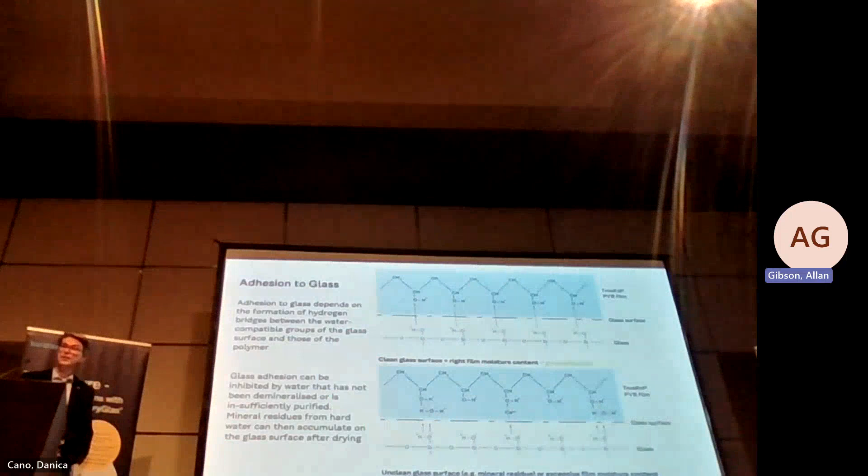Proper glass cleaning requires quality water. Only demineralized water with a conductivity of less than 20 microsiemens is effective to ensure a strong adhesion bond of

The polymer and the glass. As important is the storage of the interlayer. Moisture content of the material can adversely affect the adhesion qualities. Rolls are supplied in a protective film made of aluminium and aluminium coated polyethylene, which prevents moisture ingress whilst the roll is being stored. After use, it should be resealed, or if the roll is opened, it should be stored in a humidity controlled environment.

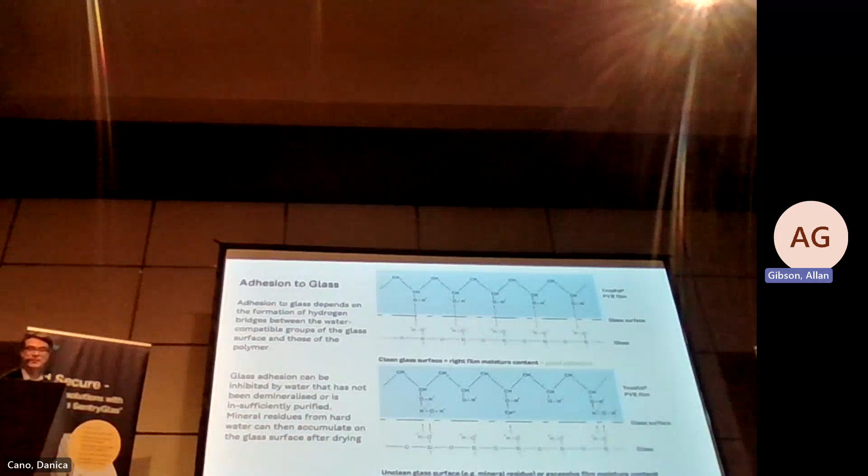SentryGlas, however, is slightly different. It's recommended that the interlayer not be used if the moisture is above 0.2%, when measured by Karl Fischer titration. Once this level is exceeded, the moisture content cannot be reversed, unlike PVB, and storage needs to be below 20% relative humidity, ideally resealed. Unlike SentryGlas, PVB can be dehumidified to 0.3% moisture content, but once it's allowed to reacclimatize itself in the correct environment.

Rolls with a PE interleave, which is very common, can be sealed back and stored at 30 degrees Celsius for the long term. In a humidity controlled environment it can last a lot longer, but the refrigeration needs to be around 18 degrees Celsius, and you're looking at a shelf life of around 4 years. So we know that works.

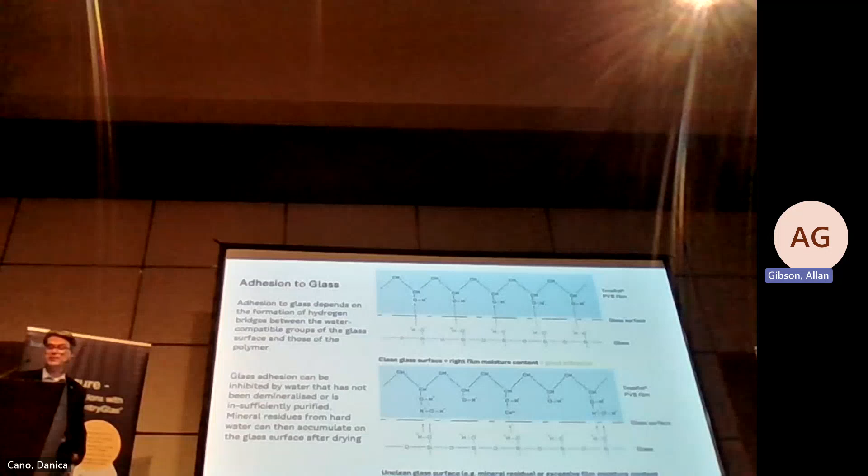So what is the cause? Now let's look at some of those causes of delamination. As a manufacturer, we run extensive tests to ensure the suitability and production quality of the material. From a quality perspective, ISO 12543 Part 4 provides test methods for durability, and it mimics the excessive conditions expected when the material is in an installed state. The three main objectives are to look at the aesthetics and measure bubbles, cloudiness, and ultimate delamination.

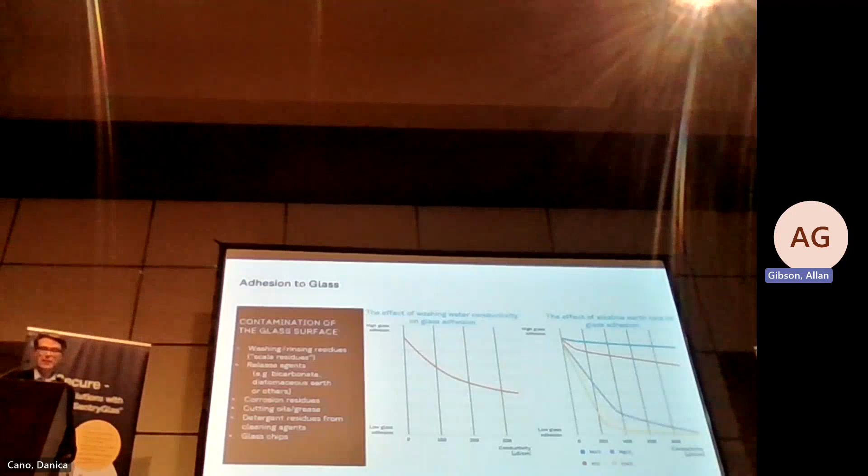This is a similar methodology used for sealing compatibility, which I'll go through later. Methods of testing, as you can see, include temperature, humidity, and solar radiation.

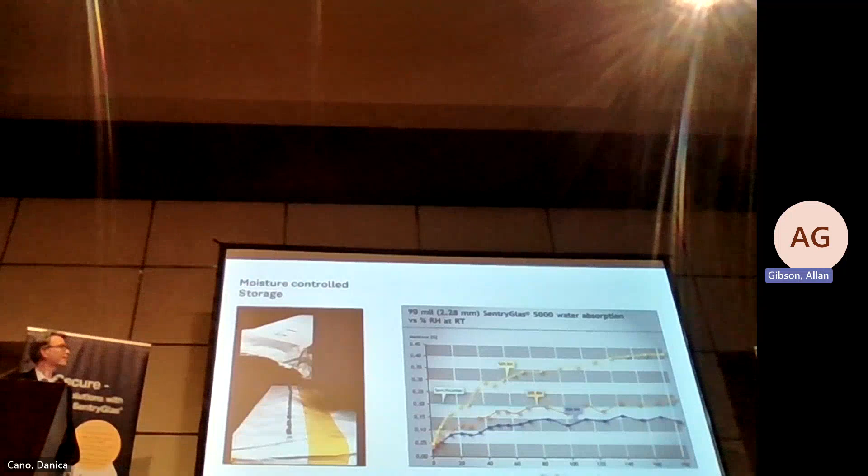These are the test methods for durability, looking at the three different options: temperature, humidity, and solar radiation.

Overall bow may also vary dependent on glass diameter and thickness, size, aspect ratio, and other factors like roller wave caused by the glass moving over a roller at high temperatures when the glass is being fully tempered. This will give a slight waviness to the glass, and it can be very much affected by the thickness of the glass, but also the pitch of the rollers. This is what is commonly known as roller wave.

Standards in BS EN 12150 Part 1 for toughened soda lime silicate safety glass state accepted limits of overall bow and roller wave tolerances between 0.2 and 0.5 millimeters as an acceptable standard, depending on the glass type and thickness, etc. But most processors will in fact produce lower than that.

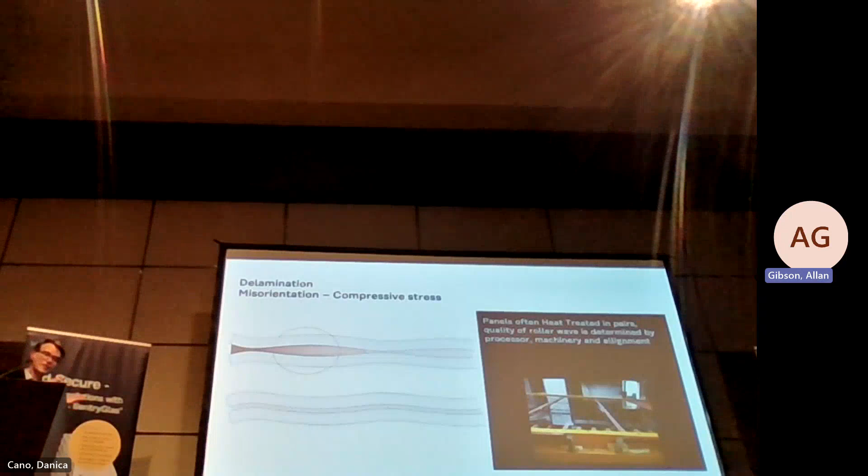When dealing with interlayers with a gauge of 0.76 millimeters, for instance, with a tolerance of 0.5 millimeters, there is a high risk that the void will not be filled, especially during processing where you're squeezing the plies of glass together under heat to extract as much air as possible, applying pressure before it's autoclaved.

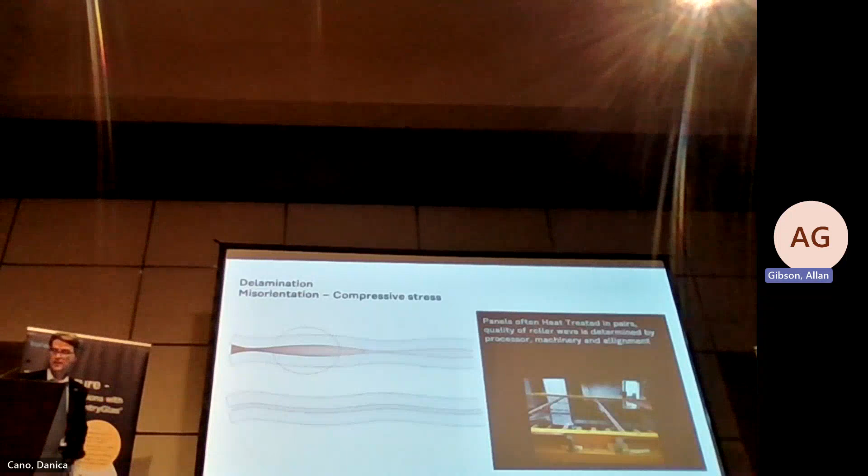But should this occur, then over time, when the material is installed with thermal movement of expansion and contraction, it can open up and prise open the glass and reveal the laminated glass, and an air pocket or failure can occur as a result of that.

Before assembly, ensure that the glass is dry. The SentryGlas must utilize the following constructions: laminated safety glass directly to the tin side. There are two sides of glass, an air side and a tin side.

When it's floating over a tin bath, that's when you get the nice smooth float glass, as it's commonly known. The side that's on the tin is known as the tin side, and the side that's not on the tin is called the air side.

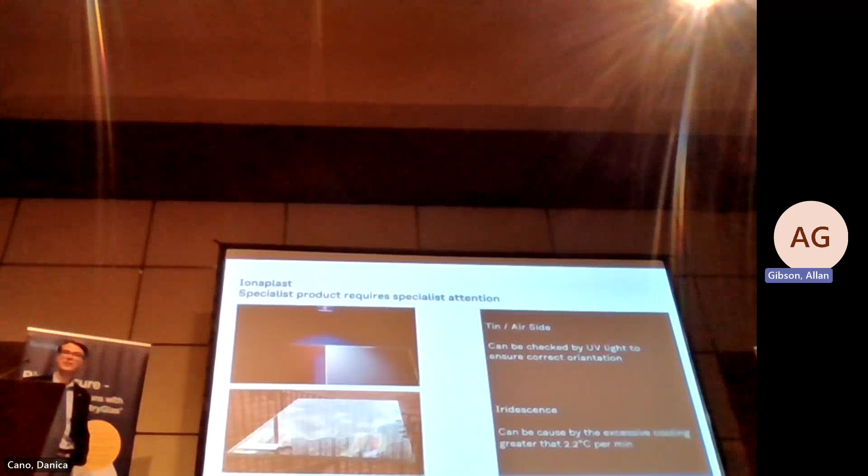However, it could be applied inappropriately. It could be too thick, or maybe the adhesion promoter is out of date. So if you apply excessive amounts of this adhesion promoter, this too could cause issues at another stage of installation.

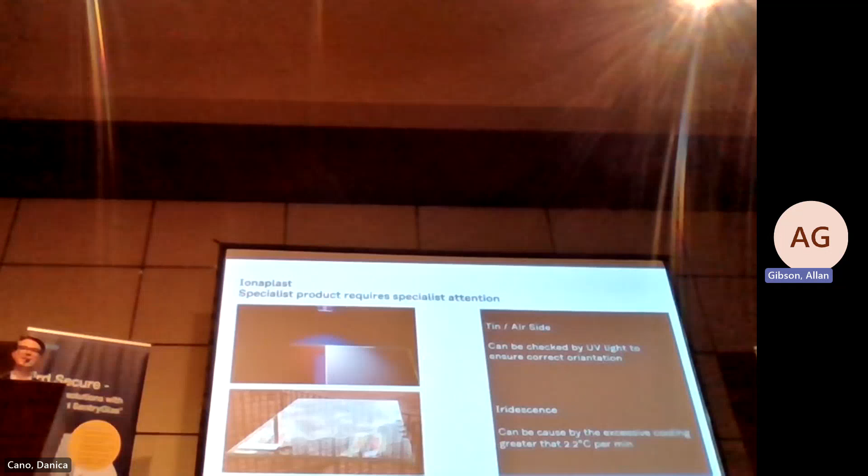Now, the cooling rate of an autoclave, the pressure cooker that laminated glass is put into to disperse the air during processing, needs to be rapidly cooled, a bit differently to a PVB. Cooling SentryGlas at a rate of 2.2 degrees Celsius per minute will help reduce the risk of haze, which is often associated with SentryGlas. However, if you cool it down too fast, you have a risk of producing iridescence. It's almost like black magic, these glass processes - they have a lot to deal with: cleaning the glass, laminating, making sure everything is correct.

But it's not just the glass or the glass processing that could cause defects. Look at moisture - we're looking at frames now. If gaskets or seals break down, it can leave the interlayer fully submerged in water. You get a lot of moisture content in the air, it condensates on the cool glass, drips into the frame, and the interlayer ends up in a pool of water. Because PVB is hygroscopic, it will absorb the moisture and could cause that milky hue we saw on the salt spray test earlier.

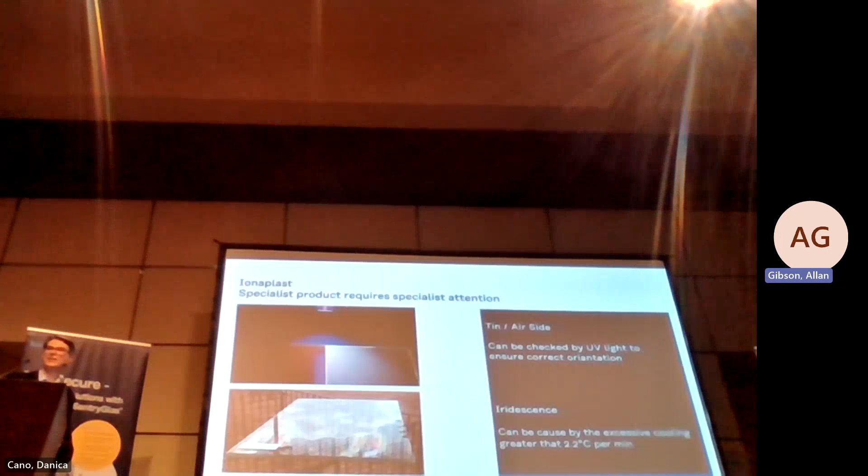Worst case scenario, which happens quite often in the Middle East, is that the materials will be ready, shipped to site, but then stay in storage for many weeks before they're actually installed. All those open edges over time are drawing in moisture - it looks fine. Then they'll be installed, trapping all that moisture. As you can see in the image, this could seal in the moisture and cause a risk of delamination at a later stage.

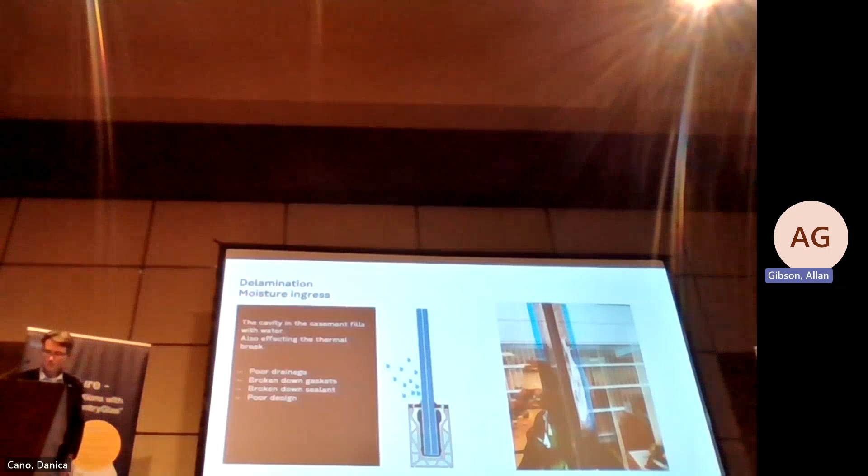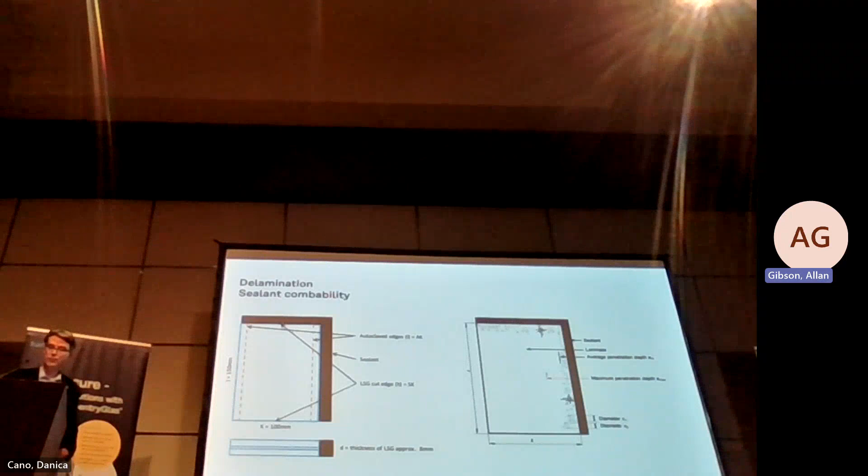Now, ASTM C1087 looks at sealant compatibility - it's a test method that checks for defects. It's also partially covered under EN ISO 12543 Part 4, but that doesn't necessarily look at discoloration as well. The compatibility of two or more materials consists in their capacity to coexist in a juxtaposition for a long period of time, without manifesting signs of detachment or delamination, discoloration, or alterations that may occur during chemical interactions. That's the terminology used for the test method.

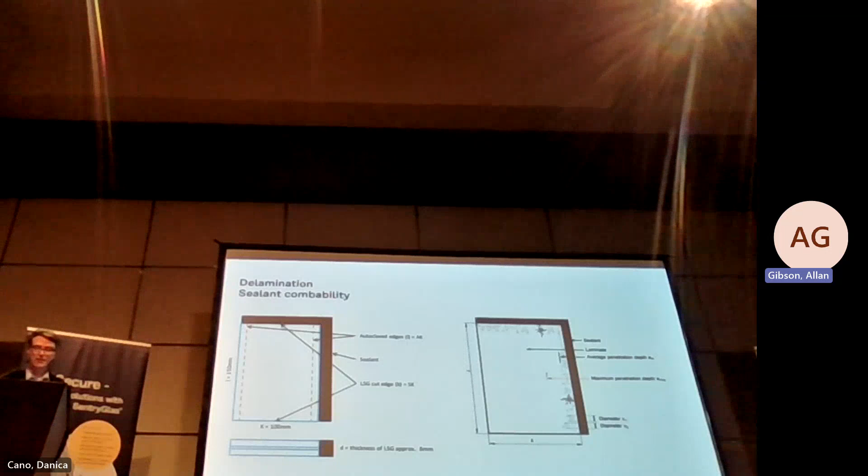So the test method for checking sealant compatibility is similar to the accelerated test I showed you earlier to check the quality of laminated interlayer glass. But this also has some similarities to the performance monitoring testing regime we have for sentry glass samples.

The compatibility test gives us data recording visible defects, which could be edge bubbles, a chain of bubbles, or channels, and discoloration.

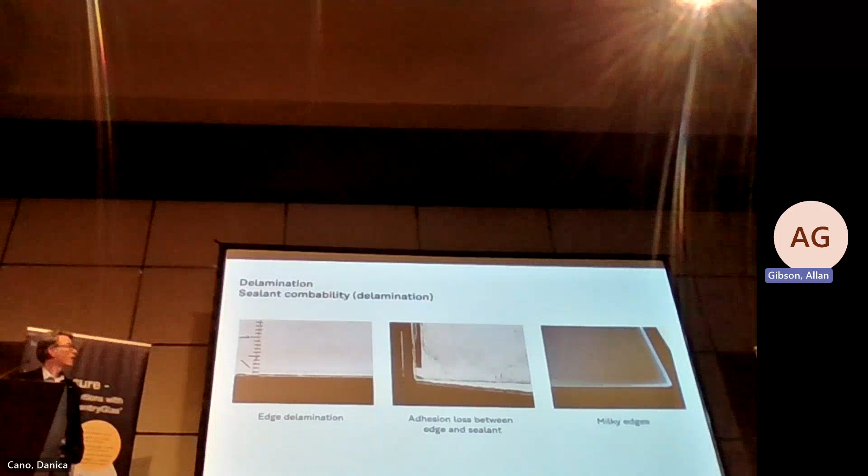Now, the depth of delamination, the degree of adhesion loss between the edge and sealant, or the visual milky effect that we saw in the salt spray test, are also observed and available.

Now, much research has been carried out by the main suppliers of sealants and adhesives, and we have compiled an extensive list of compatibility test data to help ensure the correct sealant is chosen for the appropriate role. This is available on request, and it's constantly being updated, so make sure you're requesting it on a regular basis to ensure compatibility.

There is no single standard for optical performance. Limitations only measure the glass surface, scratches, inclusions, optical performance like light transmission, but not the clarity.

Kuraray interlayer boasts the lowest readings on the yellowness index, which is why they're the most popular for the architectural industry. Especially with the increased use of low iron glass, clarity is key, and the UltraClear and SentryGlas products offer the best performance in this field. When using tints with a PVB, you wouldn't want a yellowish effect to tone the finished result, would you?

There is no standard for the optical clarity of laminated glass, but much is known about the index of refraction that measures a ray of light as it travels from one medium to another. As it begins to travel through a material, the interaction between electrons and photons reduces the speed of light, and as the density of electrons increases, the velocity of light becomes slower.

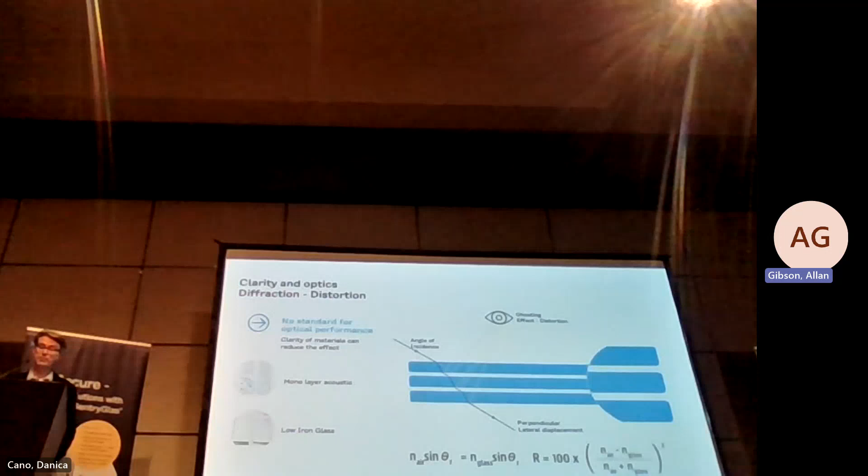That's why light moves at the highest possible speed in a vacuum. The light's transmission angle can be calculated using Snell's law, and the discrepancy between the light transmission and the incident angle becomes bigger as the index of refraction becomes larger.

A change in the index of refraction due to the change of wavelength is known as chromatic dispersion. The more layers in the construction, or the greater the angle of incidence, can increase this factor, causing ghost images. This is why a mono acoustic interlayer, reducing the number of layers, can reduce this optical effect. But also the clarity and coupling effects of an interlayer can add additional benefits affecting chromatic dispersion.

Now I'll finish with the beware. Cost of ownership is heavily influenced by the right product ultimately being fit for purpose. However, that product that is fit for purpose may also offer additional attributes and added benefits. These added benefits may improve structural, optical, and thermal performance, sound reduction, solar control, ease of maintenance, etc.

Here are some other factors that influence the cost of ownership. In my short time within the industry, I have witnessed some failings that have resulted in very costly replacements. Replacements that were needless and often associated with specifications that were not fit for purpose, or later became generic during the tendering process, opening the door to similar or approved or value engineering, without fully understanding the reason behind the original specification.

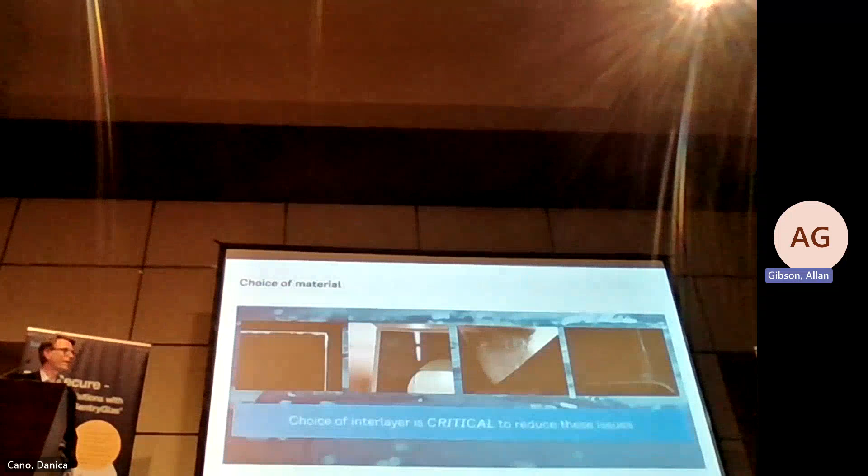Sorry, next slide please, I got carried away. It's a very emotional part of that. Go on, carry on please.

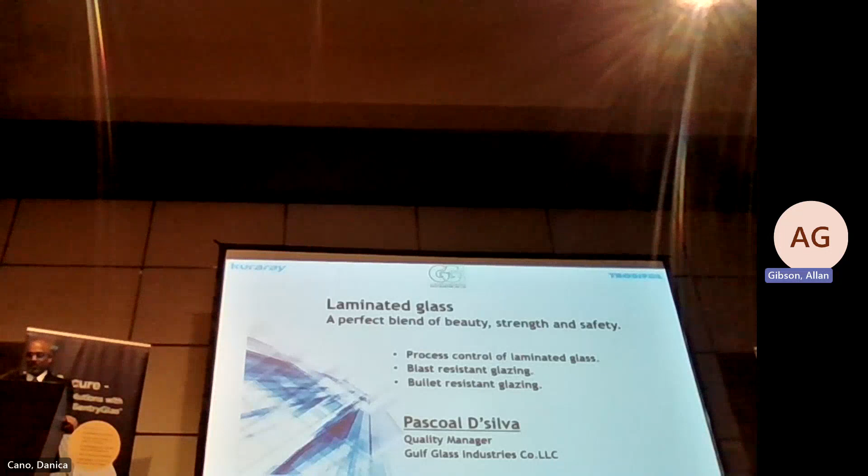My name is Pascoal D'Silva. I've been in the glass and glazing industry for nearly 25 years, and 20 of those years I've been working with Gulf Glass Industries. Some of you know Gulf Glass Industries - it's a 31 year old company, the first company to laminate glass in the UAE and the Middle East, so we're the first laminators. So what we're sharing here is all about our 20 years of experience in laminating glass. Apart from that, we were the first ones to install SentryGlas, laminated exposed edge glass, on a building on Sheikh Zayed Road in 2009. By now it has passed its warranty, but it's still looking good. It's a building called Maze Tower. If you ever get a chance, you can have a look at that laminated glass, exposed edge, perfect beauty.

So laminated glass has many interlayers - the types of interlayers that Kuraray's Allan has touched on, I would just expound on that. There's something called EVA, we have polycarbonate and PU, and we have cast in place, known as resin. These are the types of interlayers that go into laminated safety glass. Making laminated glass is not an easy thing - it's a very, very sophisticated control process, and that's why we need to look at process control. You can see the two main ingredients, or the two main criteria, are glass and the interlayer.

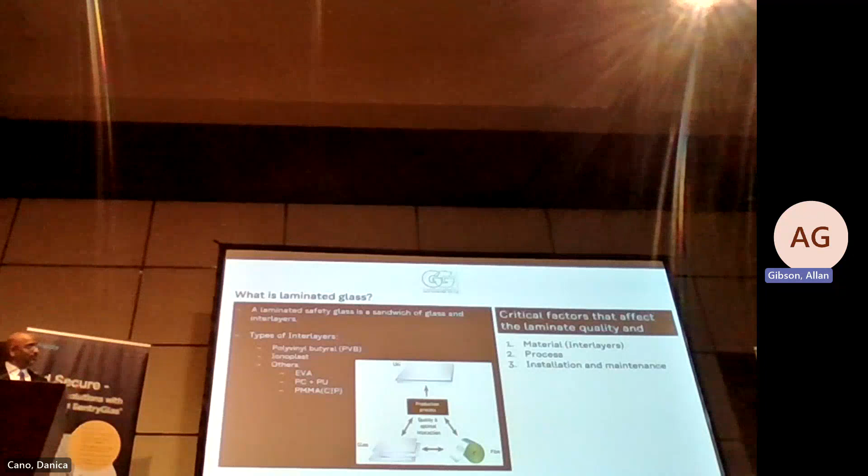So what are the critical factors that affect laminate quality? First is material, second is the process, third is installation and maintenance, which Allan has touched on a little bit.

Cheap can be expensive, and this is what is happening, this is what we find mostly. Until 10 years back, everybody specified - architects were saying 5 years laminated glass warranty. Now we have specifications asking for 10 years, extended to 15, extended to 20 years. When we go to PVB manufacturers they say, guys, this is your problem, you are the black magician, you deal with it. So the specifications and the life expectancy of laminated glass is 25 years. So how do you give a product in this market that is going to reach such warranties or life cycle? That's the critical thing.

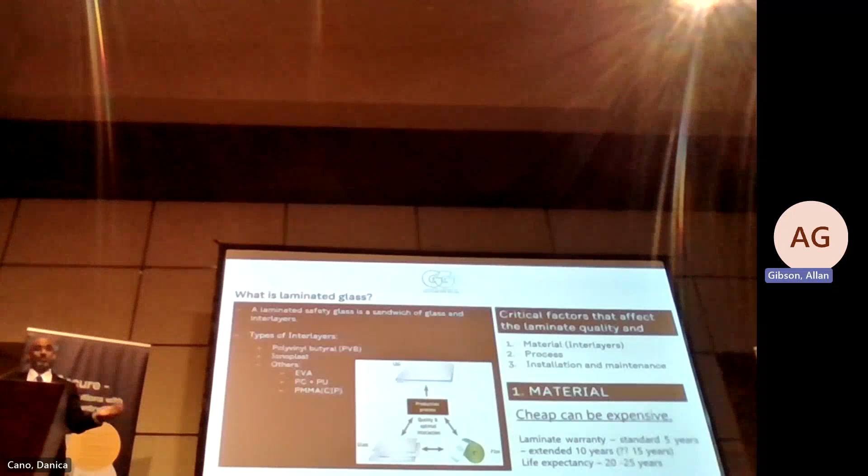Until 10 years back, we had only 5 PVB manufacturers - today we have 50, and none of them have accelerated testing or weathering tests done like our friend Allan showed us, the accelerated weather test or weatherability test. So it is something where cheap can be expensive, especially if you have a building with laminated glass.

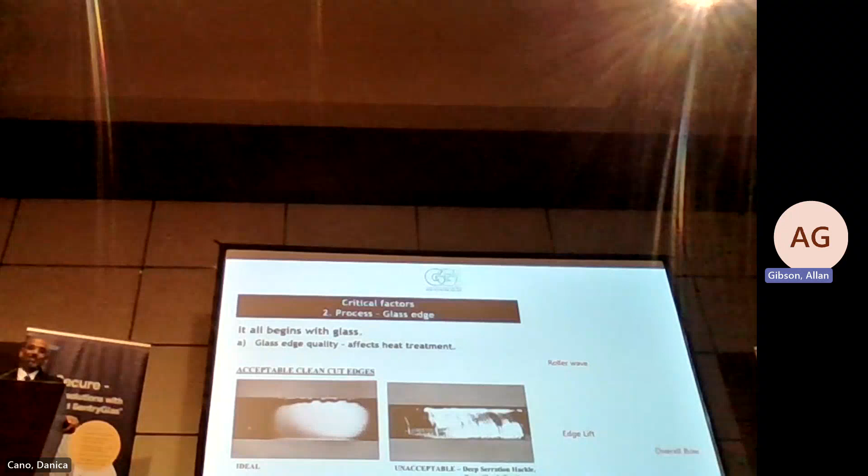The critical factor we spoke about is the interlayer. The second thing is glass, and that is the main ingredient. If you do not cut your glass properly—and that is why we are the processors—you need to be very careful of how you process the glass.

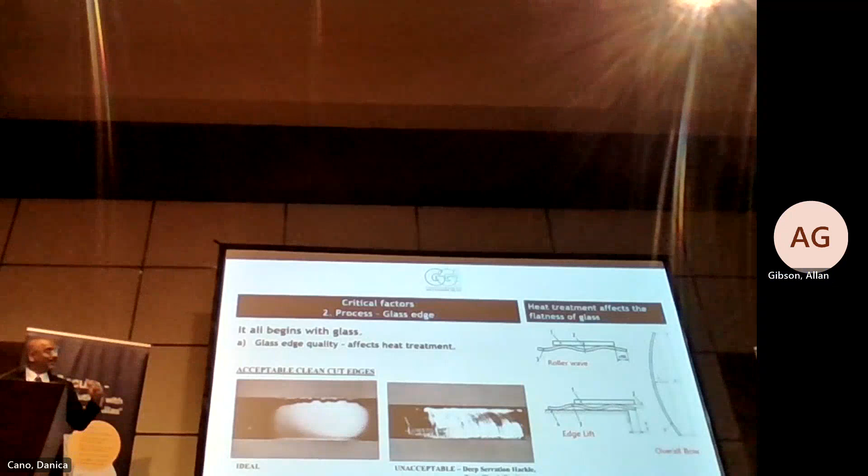If the quality of the glass edge is not perfect, it will affect your heat treatment quality. Heat treatment affects the flatness of your glass—that means roller wave, edge lift, and overall bow.

So it all begins with glass. Lamination begins with glass, not the interlayer. It begins with getting your glass right.

The European standards, which Allan referred to, are EN 12150, EN 1863, BS EN, and ASTM C1048—which doesn't have much. But the most stringent one is the EN standard, 12150 and 1863. But those European standards for toughened glass or heat strengthened glass are not good enough for lamination, and specifications still continue referencing the European standard, saying 'we follow the European standard.'

What is the recommended flatness for laminated glass, heat treated flat glass? Something like this: roller wave should be less than or equal to 0.08mm compared to the 0.3mm standard. Edge lift, 0.15mm compared to the standard 0.25mm. Local bow, 50% down, less than 1.5mm per meter compared to 3mm.

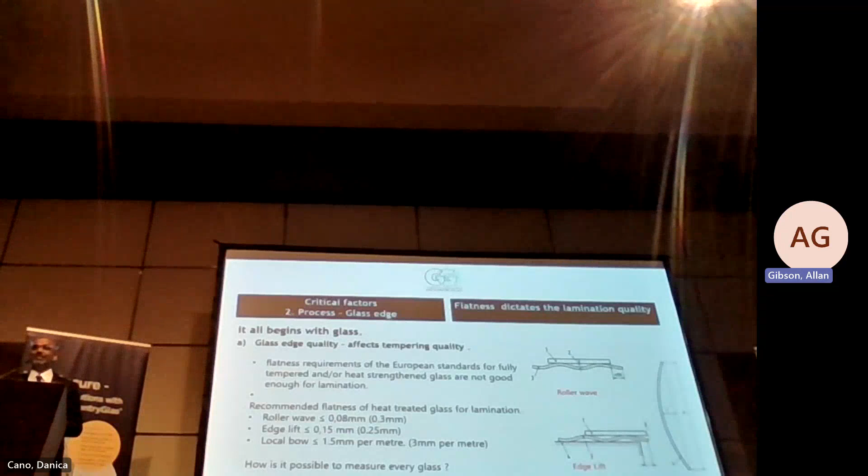So the question is, I have 10,000 or 20,000 square meters of glass laminated—how do you control it? Technology has advanced. You can measure each and every piece of glass that comes out, especially for laminated glass, and make sure your values are in range.

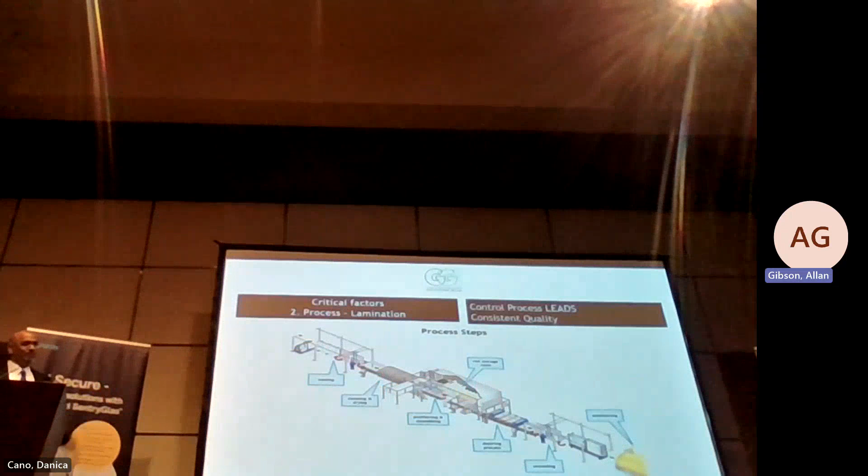Just a process—this is the lamination process. Looks easy: loading, cleaning, drying, positioning, roll storage. It looks like a laundry thing, but it is not. De-airing process, unloading, and then the autoclave process.

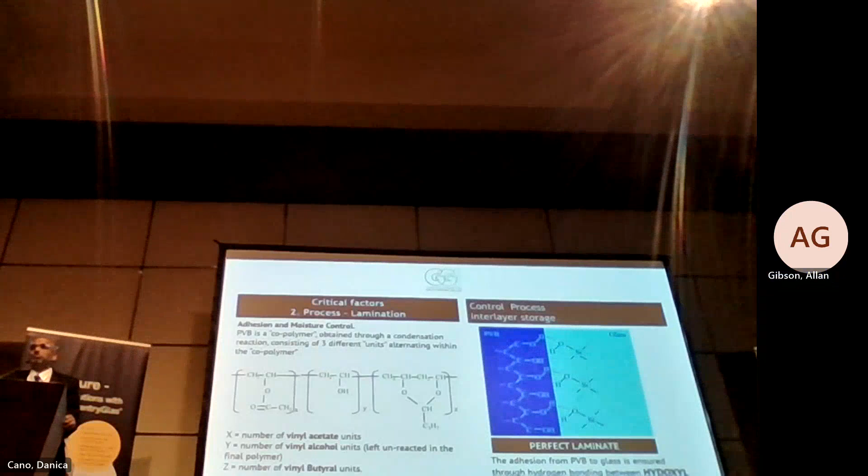We have spoken about this—it's the adhesion, at least for PVB, the hydroxyls from the PVB bonding to the silicon, and that's the perfect laminate that you would have. But unfortunately, there is no laminator who can give you this sort of perfect laminate.

Why we are saying air side and tin side: the moment you have on your glass alkaline or earth alkaline metal ions, it will create an interaction. It will create a problem for your adhesion, and this cannot be avoided.

In the Middle East today, everyone wants a glass which is outside laminated glass, coated laminated glass. You cannot have air-to-air side on a PVB with laminated coated glass, because coated glass has one side which has coating and it is the air side. So the only side available for you to laminate is the tin side. So there comes a challenge for PVB manufacturers—when you're putting glass on the external facade, you need to use high adhesion PVBs. And nobody talks about it because it's not there.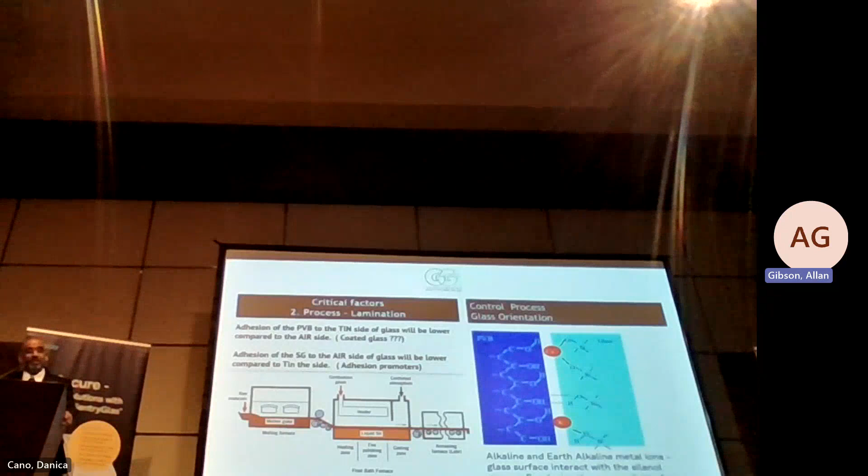So anybody can use a low adhesion PVB, and then you get delaminations after 5 years. This is critical because it is chemistry, it is what it is. For SentryGlas, you cannot laminate on the air side, so you have adhesion promoters. Those work.

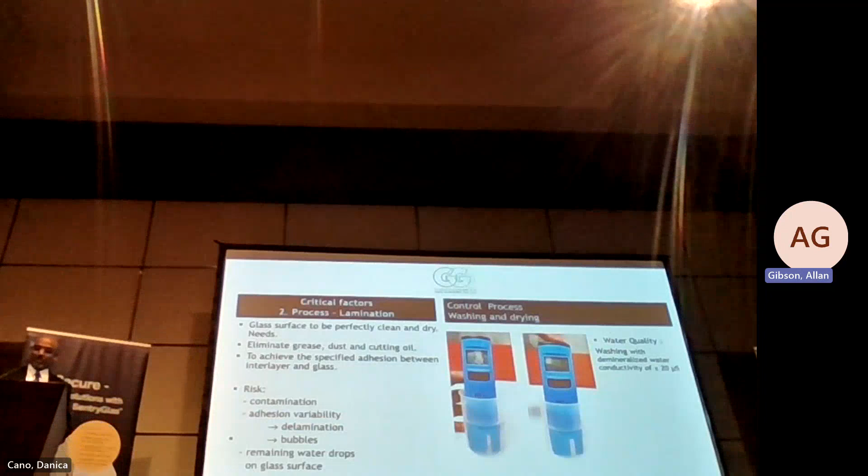We spoke about washing. The water that we drink has a conductivity of nearly 670 microsiemens. The water that we use in washing the laminate is only 16 to 20 microsiemens. So you need to be careful about who is processing your glass and how it is being processed. The conductivity of water also affects your lamination—it will have variability in adhesion, and that will cause delaminations later on and bubbles.

Next, I need to have some water.

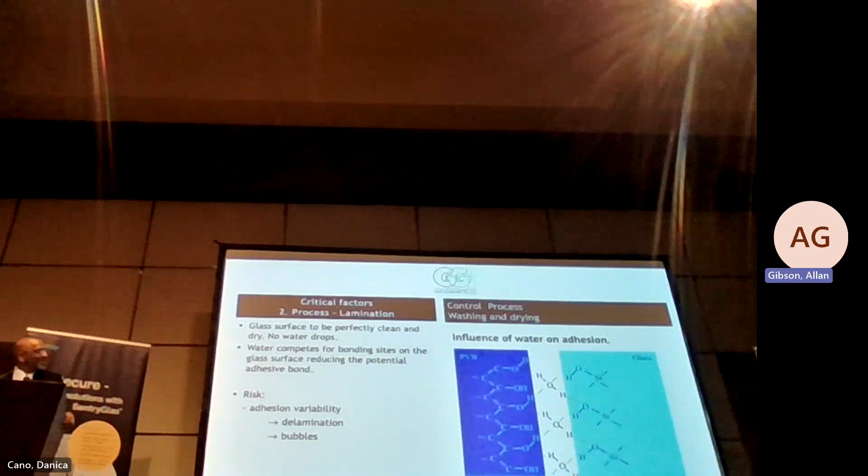Influence of water on adhesion. A single drop of water on the PVB or on the glass is a disaster for your lamination. So the glass that comes out has to be perfectly washed, dry, and clean, just like how my wife does it. So you need to bond it perfectly with no water on it.

Room conditions. You look at this guy, they enjoy working here for the next 3 months because the temperature inside there is less than 25 degrees. Relative humidity is 18 to 25%. So that sort of controlled condition is very critical because once you supply the laminate to your project, it looks perfect. The problem starts after 3, 4, 5 years.

And if you have asked for 10 years warranty, sometimes either the processor is missing or the PVB manufacturer is closed down. That's not the case with Kuraray. They said 50 years, so we have been doing lamination for them for 25 years. We can confidently say we do not have such issues. There are problems, we have learned from our experiences, but this is what makes us good laminators.

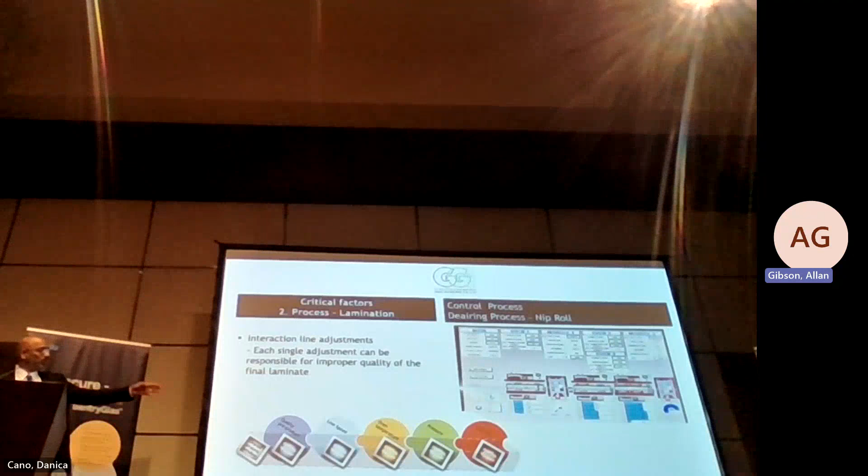De-airing process is very important. You need to remove all the air. You have 2 glasses and the layer, then you press it and remove all the air. A little bit more air remaining in the laminate will cause bubbles on the side. So each and every adjustment done on this de-airing will affect the quality of your final laminate. There are line speed, oven temperature, pressure, heaters. The heaters are now mostly convection heaters, so they are more effective.

Vacuum bag. We are talking about bullet resistant glass, curved glass. The only way you can do that is through using either vacuum bags or silicone bags. The productivity is low, but the efficiency of getting a good laminate out of de-airing from such a process, the vacuum bag process, is very good. But it's difficult to process flat laminate glasses through the vacuum bag. There are a lot of demands nowadays where you have metal interlayers in the lamination, so this is the process that can give you optimum quality.

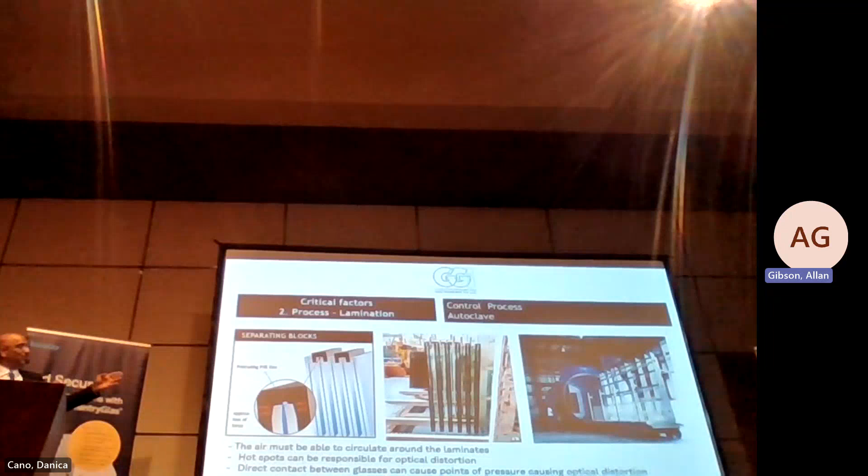This might sound simple, loading the glasses, but if you get this wrong after doing everything else correctly, you can have a sunburst delamination on the edges, just like many of us have seen, half moon shaped. That's because many people don't understand that as you stack the glasses into the autoclave, there are chances of pressure points coming on the glass. So what you see in the middle is, always try to keep the laminate freestanding, not having pressure points. And the last one is the autoclave, which Allan has already spoken about. Autoclave conditions and cycles are very important, otherwise you will end up having haze or inadequate adhesion.

So pummel test, just a picture of how pummel test is done to check whether it is high adhesion, medium adhesion, or low adhesion. It's done at minus 18 degrees centigrade using a freezer, that's for checking the adhesion.

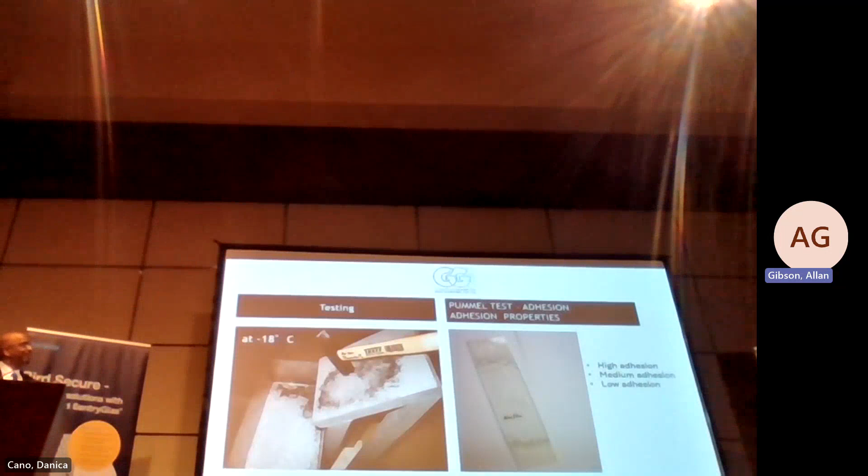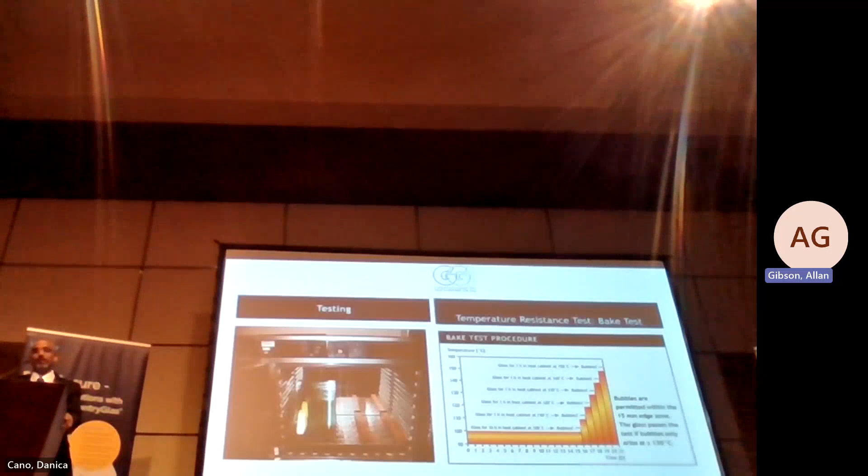The second one, this is where the temperature test is done. Basically you're raising, keeping the glass at 100 degrees centigrade for 16 hours, then incrementally increasing it 1 hour, up to 130, but after 130 you can go up to 180, 190. Temperature resistant test is very critical, considering that we are in a country where glass temperatures can easily go up to 100 degrees centigrade. And if it's a spandrel glass, that can be much higher. So using laminated glass in spandrels, you need to be aware, as most of them might be well engineered or well known on this fact, that the temperature in laminated glasses can go very high.

This is an easy test. Just in summertime, take a bucket of water, it's already 100 degrees, put your laminate in and check it out. That's the boil test. You just put it in the hot water for 2 hours. If you see bubbles, make your claim.

The important part is security glazing, and Kuraray and the Society of Facade Engineers wanted me to touch on this. Security glazing is so important because architects for the last 30, 40 years want transparency. They want glass everywhere, minimal systems, and there's high demand for transparency, getting more light in and keeping the heat outside. But we have to be a little cautious when doing such designs or considering where buildings are located, because security glazing focuses on reducing the risk of injury and material damage. So it's about people and it's about property, and both are important.

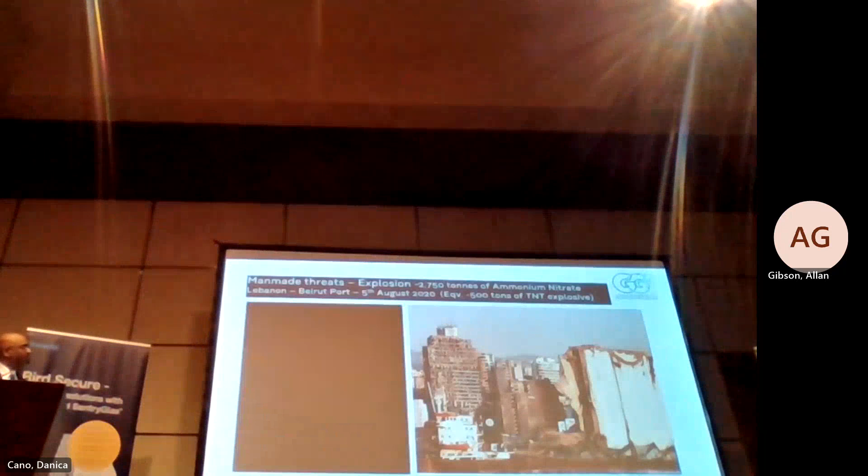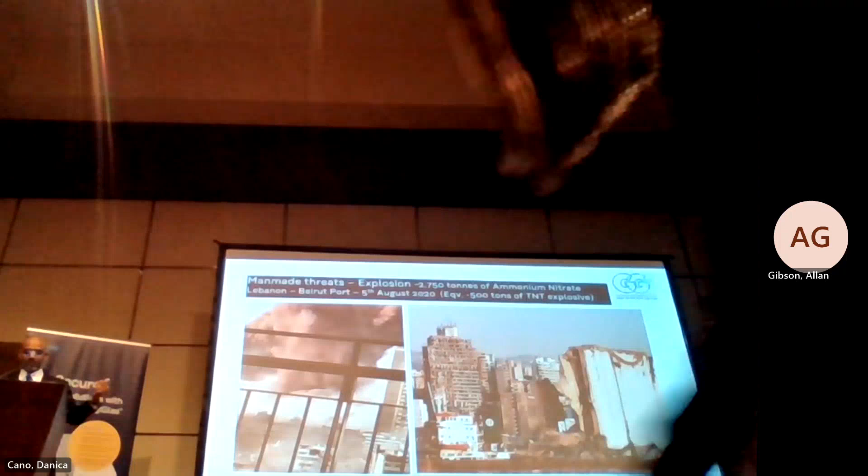Can you play that? So that is an explosion at a port which happened in August 2020—2,750 tons of ammonium nitrate. That was the effect of 2,750 tons of ammonium nitrate which was stored. When it blasted, it was due to an accident, human mistake, or negligence—it was not a terrorist attack, and I'm not touching terrorist attacks today. I'm talking about explosions that happen due to negligence and accidents. The 2,750 tons of explosive material was equivalent to nearly 500 tons of TNT, and the effects were seen approximately 3 to 5 kilometers away from the explosion site.

Next one. This is the building which is the electricity department headquarters of Lebanon. Before the explosion, everything is intact with the facade. I just checked my sources—they said it was double glazed, monolithic tempered glass. Next slide, please. And this is just 2 days after that—there's no glass there, not one, which is strange enough. You could see small particles of tempered glass stuck into the frame. Everything was probably sucked out or pushed in, and you can see the property damage done. Next slide. That was 3 kilometers away.

This is another building, no facade—the glazing or glass is completely off, but the aluminum structure is still there. That's St. George Church, which is 2 kilometers away from the place. They did use laminated glass, but the laminated glass along with the frame is completely pushed inside because of the impulse force. Next slide, please.

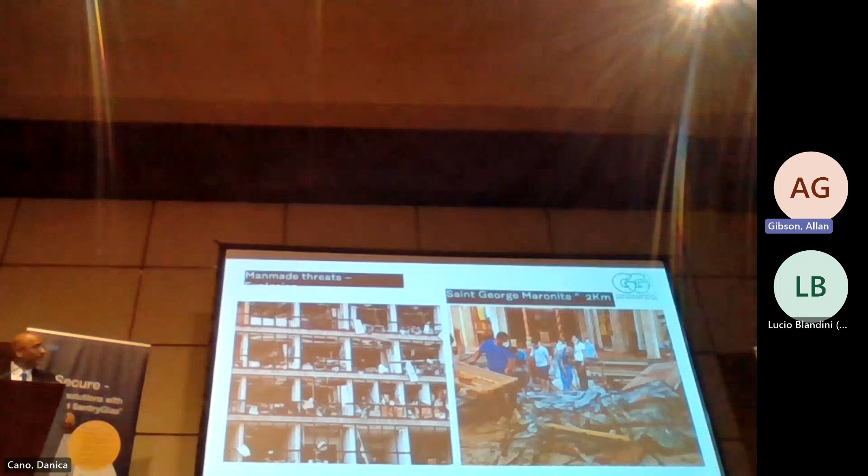Not far away, if we say explosions won't happen in the UAE, in Khaleej Times on May 23rd, 2022, we had an explosion in Abu Dhabi. 2 dead, 120 injured, nearly 6 residential buildings affected by the blast. You can actually see tempered glass particles down there. Next one. And this was in the newspaper—windows have been shattered in the buildings and shops of the next street. It was a major fire and impact. I have not seen anything like this in the past 10 years here. So explosions and accidents can happen anywhere. Are we ready for it?

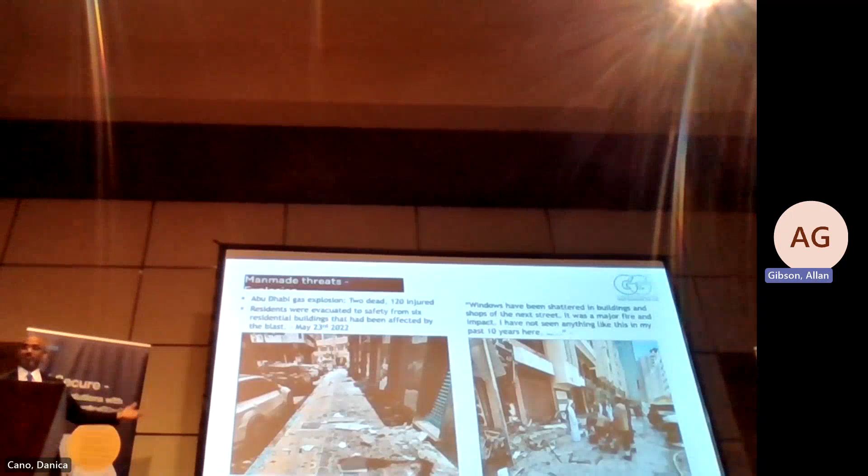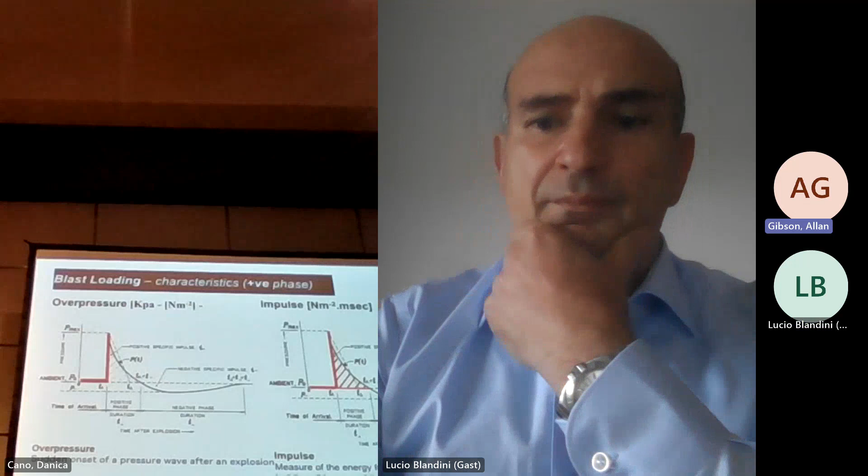So those are the characteristics. You have overpressure in kilopascals. The one which happened in Lebanon was 80 kilopascals. We designed buildings to 2.5 or 2.8 kilopascals wind loads most of the time. But 80 kilopascals is something that glass cannot really handle unless it is designed for that.

The impulse is basically the measure of energy from an explosion onto the building. So these are the characteristics of positive phase. The negative phase is where it is pulling or sucking that out. The pressure is not high, but the time duration is quite long in the negative phase.

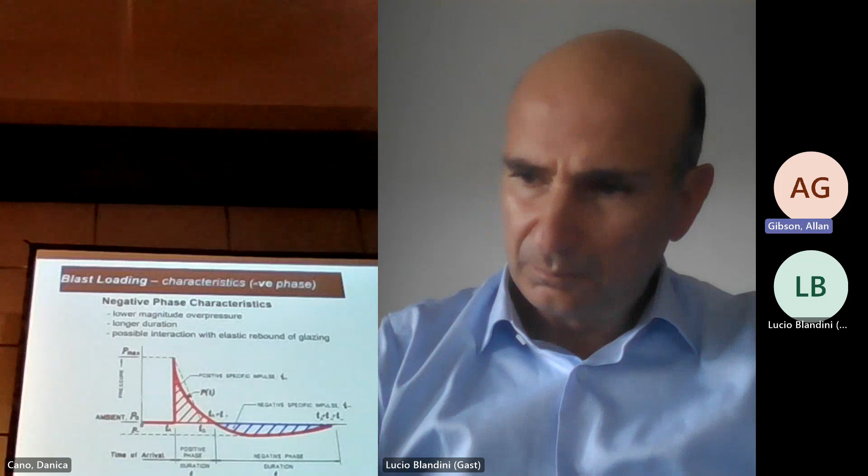So the key things are overpressure, impulse, and the proximity of where the blast is happening. That is the reason you have roadblocks, barricades, and security, depending upon the impact on people's properties. So if you have a device of 100 kg TNT, your overpressure at 50 meters standoff distance is 28 kilopascals, and the impulse is 255.

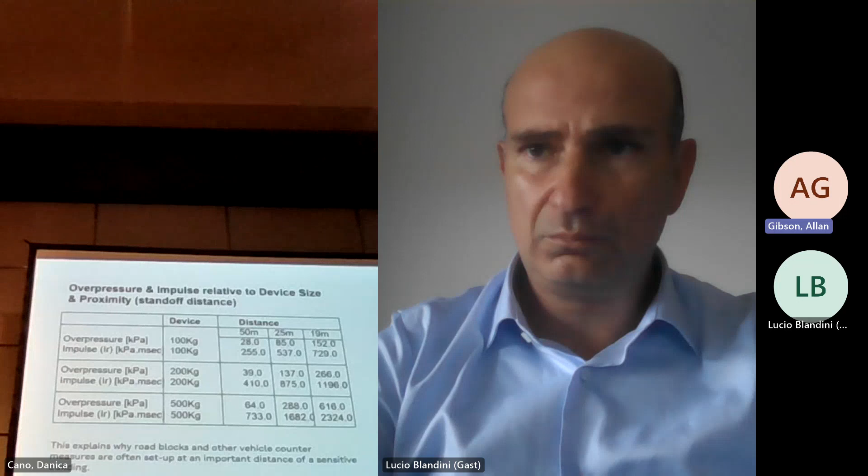So this is a table that can give you an idea of how important standoff distance is. So when you design buildings close to a security zone, you need to consider the standoff distance.

Rule of thumb: the bigger the bomb, the higher the overpressure, the longer the duration. The closer you are, the worse the blast pressure you will feel. Greater standoff is needed for more explosive devices. Those are the rules of thumb.

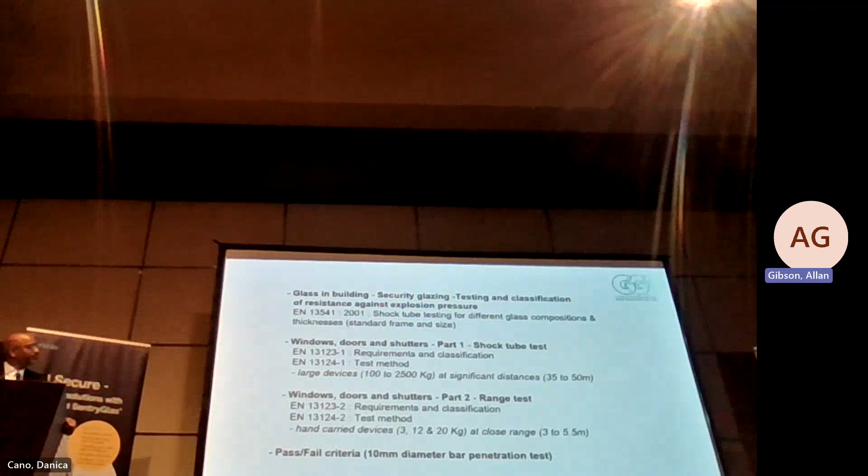Codes. So these are all the codes that are there. We have basically spoken about EN standards. There's the shock tube standard and also range or arena test, but they are different. For glass, it is EN 13541, which is only for glass glazing. But for windows, shutters, and other parts, you have shock tube and arena tests.

This is the volume. Wait for it. Okay, that's a shock tube, that's in the US.

The pressure builds there, that's a thermite charge. And this is the diaphragm that blows out at the end of the shock tube.

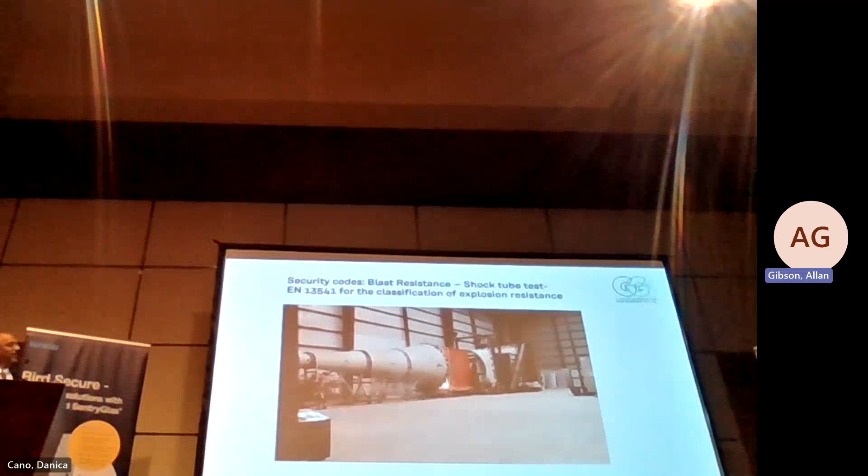So that's the testing that is done so you don't have to do it on the arena, because it's much more costly. Shock tube testing is much more economical.

This is again the classifications ER1, ER2, ER3 based on the standard, giving you an idea of the blast wave, the impulse, and the duration of the effect.

So this is the right type of interlayer. You can see the impact that is taken by the interlayer, and the pressure is now blown off.

The other one was just tearing off.

This is arena testing based on ISO 16933. So you can even do arena testing with 70 kilopascals. You have hand carried and vehicle bombs, so you can actually do that in arena testing.

This is the American standard where you have ISC security glazing and GSA, which gives you a much different criteria for accepting, which is: when the blast happens, how far will the glass fragments go? That is a category that is additionally put in the American standard.

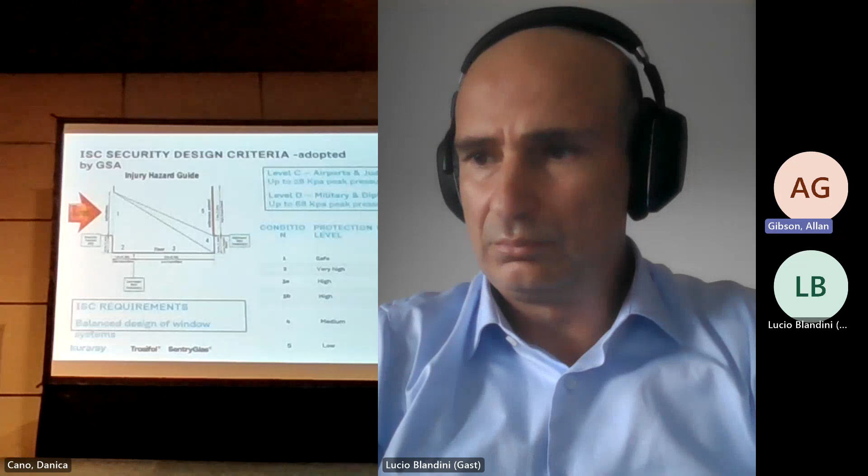Ballistic glazing. Why it is so important is there's a high demand now for high-profile individuals and people who need bullet-resistant glazing, and it is just going up and up. At least in the Middle East, a lot of people are asking for ballistic glazing. The type of ammunition, the injury from the bullet, and the injury from the glass pulse is one of the criteria.

You have even shotguns in this classification.

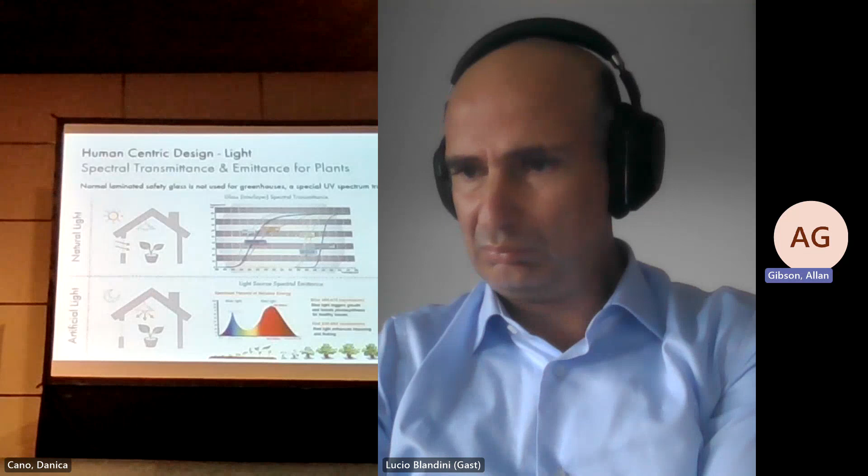And what's quite interesting, because I was talking about human beings, what about plants? There are specialist interlayers, also by Kuraray, that transmit UV light. Whatever we do with our glass, either with coatings like solar control coatings or with interlayers, we're filtering out a certain spectrum of wavelengths from the solar spectrum that comes from the sun. For example, Kuraray has this product especially for greenhouses, called SentryGlas Natural UV. It's an interlayer, because usually PVB interlayers block the vast majority of UV light. This UV light is needed by the plants, or there's a lot of discussion with botanical specialists whether it's the plants or small animals in the plants that need it. Nevertheless, we know what plants need.

This also brings us to artificial greenhouses or so-called vertical indoor farms, where a lot of research has been carried out on what kind of light spectrum plants need. Usually in these vertical farms you see a kind of pinkish spectrum, so a major component is the blue light and UV light, which is then transmitted by the interlayer. If we look into artificial lighting, there was a lot of research carried out on what kind of light the plants need, and we have 3 peaks in the blue, red spectrum, and so on. This is what these vertical farms are then using.

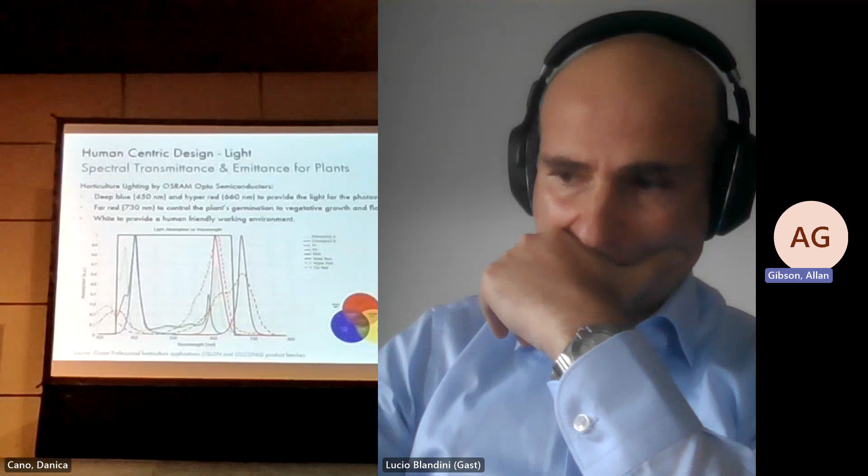Let's go to the next slide. There's a lot of research on what kind of spectrum plants need. You can see these 3 peaks, and we know exactly the wavelength. In principle, talking about the solar spectrum, what our human eye can see is around 380 to about 780 nanometer wavelengths, the so-called visible spectrum. This is what all of our coatings on the glass, and also the interlayers, are optimized for, so that we have high transmittance in that spectrum for the human being. Everything else, ideally, is either reflected or absorbed, because that is solar energy, and we want to keep it out to reduce our cooling loads. Next slide. Now, the big question is, this is now about plants, and you can nicely see on the left-hand side everything is kind of greenish.

We go to the next slide now. You might ask, why is this guy here talking about plants when we're talking about laminated glass and facades? Now, the key question is, do we know precisely what we need as a human being? I'm currently running a research project with Guardian Glass about a more human-centric design of solar control coatings. Right now, our coatings are purely optimized to reduce the solar heat gain while still transmitting a maximum of the visible spectrum. Now, why do we need light, and why do we need a certain quality of light?

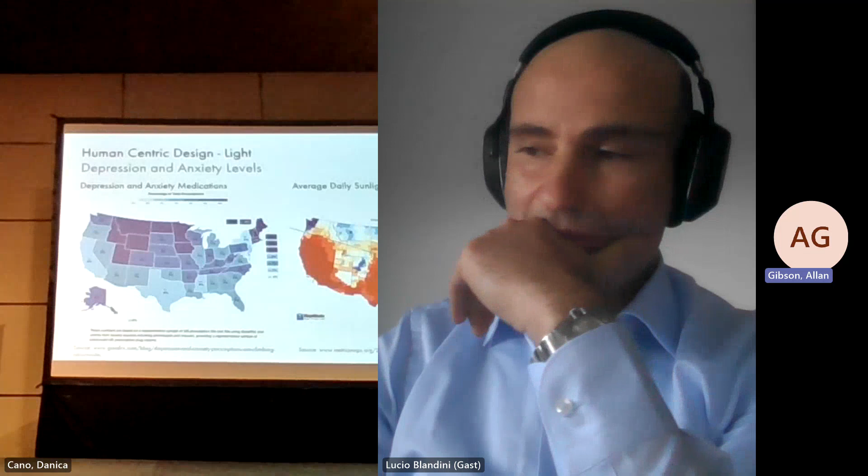Go to the next slide. And this is a bit of the research that we're currently focusing on: what is the quality of light that we as human beings need, or do we even need light? This is a very nice map on the left-hand side, showing the percentage of people with depression and anxiety, and the percentage of people medicated against depression. On the right-hand side, we see the average daily sunlight. What we can nicely see is that states in the United States with a high degree of natural sunlight, like Texas and California, have the lowest percentage of prescriptions against depression, only about 6%. So there's a very clear correlation between exposure to sunlight and people getting depressed.

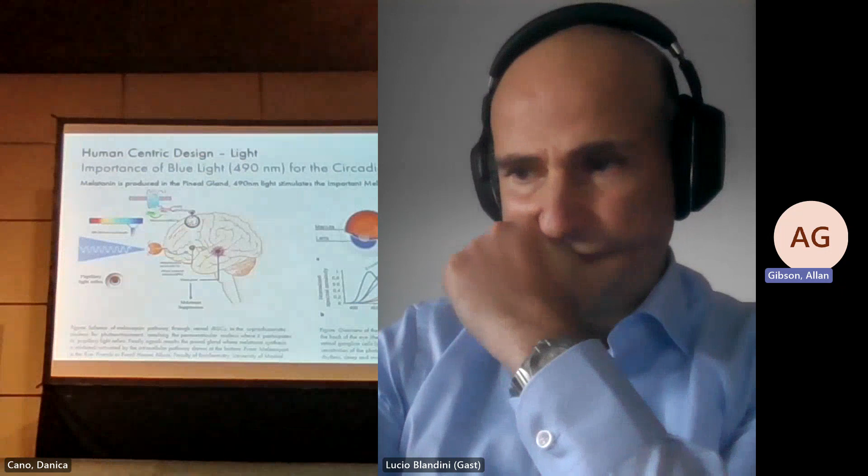Go to the next slide. A lot of research nowadays, including our current research with Guardian Glass, is focusing on the blue light spectrum, about 490 nanometer wavelength. This is very important for the so-called circadian rhythm of human beings, the day-night rhythm—people wake up in the morning and should get tired in the late afternoon. We need this blue light spectrum to get awake, and we don't need it when we want to fall asleep. This is why most mobile phones—iPhones, Apple, Samsung, Android, whatever—have a night mode. When you switch on night mode, this blue light spectrum is taken out, because this blue light spectrum keeps us awake.

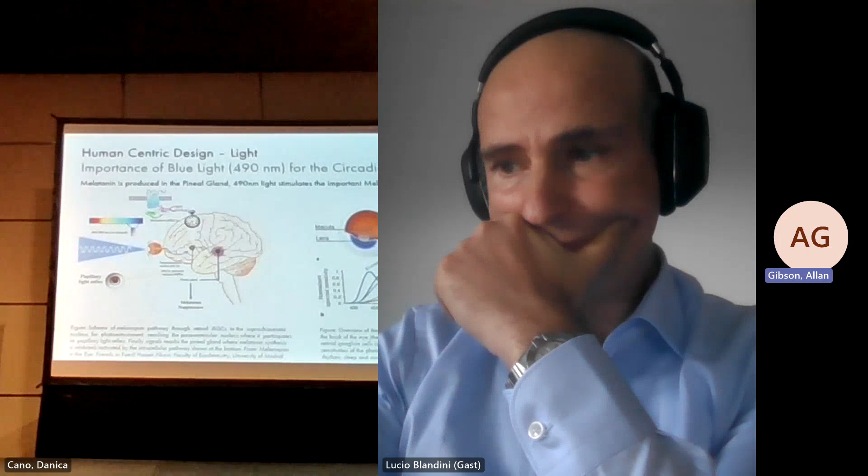However, if we don't have exposure to this blue light spectrum, we're not properly waking up and people are getting depressive. Is this blue light spectrum properly transmitted by our current solar control coatings and interlayers? This is currently a bit of research that is ongoing. We need melatonin to fall asleep, so we need this during the night. But during the day, we need cortisol, and this is clearly dictated by us. Our eyes perceive this wavelength of blue light and then get it into our body, showing how sensitive we are about certain spectrums of light. This is currently research I'm focusing on.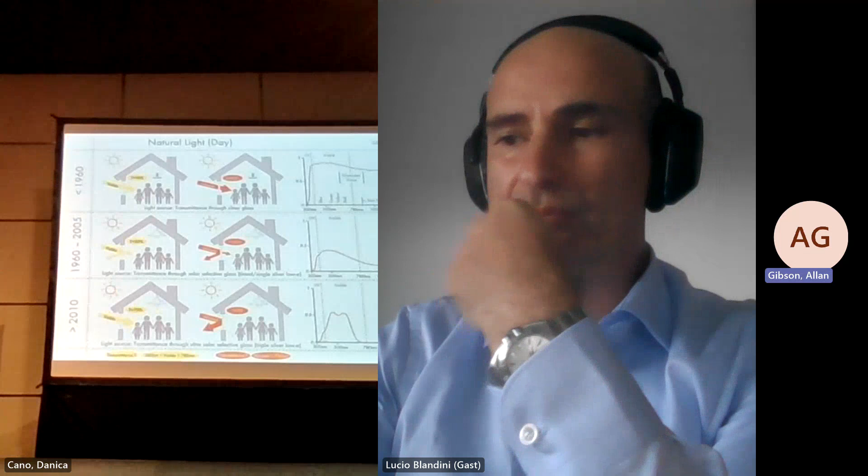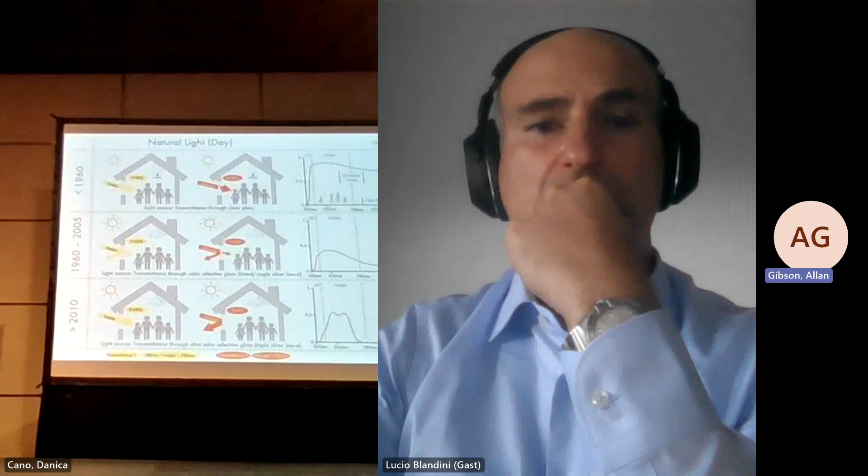The early coatings, at the top, have a relatively homogeneous transmittance across the complete spectrum. Of course I started filtering out the UV light, which Kuraray is then going back to get back in, for example, for greenhouses. But then we can see the coatings are getting more and more solar selective, meaning they're very selective in terms of what they transmit versus reflect or absorb. The modern solar control coatings we have nowadays, at the bottom right, only transmit purely in the visible spectrum - everything else is filtered out. So our terms, natural daylight coming through glass, it's gone. It's no longer natural, it's a filtered spectrum.

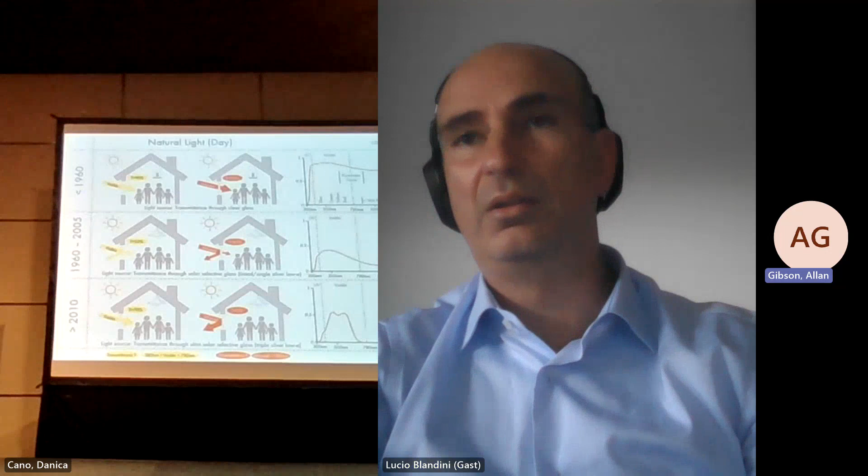How does that affect us as human beings? We don't know - nobody knows right now. It's a bit of an experiment that we're currently doing with all of us. And also we, as facade engineers, as facade professionals, do we know what this glass is doing? No one really knows. The problem is with plants, it's quite simple - you expose plants to light and they grow. But that's not the case with human beings; it's a bit more complicated.

If you go to the next slide - I think we are, oh yeah. This brings me to Professor Dr. Lucio Blandini. I hope we can now swap to Teams. Lucio is going to present about some latest research from the University of Stuttgart. I think we go to Teams.

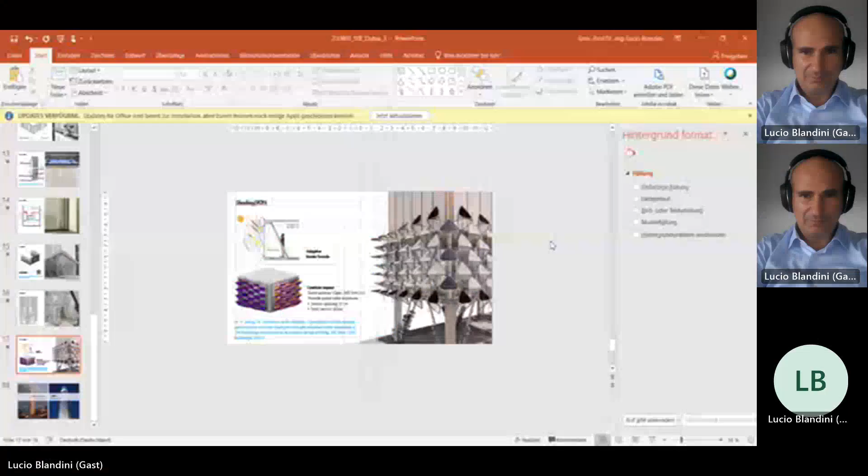Thanks, Ben, for the introduction. I will talk about innovative facades for sustainable architecture, and I will focus on one of our research topics, which is adaptive facades. So where is the motivation for approaching adaptive facades as a possible solution? I've been working in practice as a facade engineer for more than 15 years, and here is just one example: the Etihad Museum in Dubai - I believe most of you may have visited it.

Even if we find a possible combination between high transparency and solar protection, by carrying out all the daylight analysis and using all the possible devices, the proper coatings, proper fritting, and so on and so forth, it is just a compromise, because we have to set up a glazing system which works in different conditions. And that was one of the main motivations to focus our research work on facades where you can change properties over time.

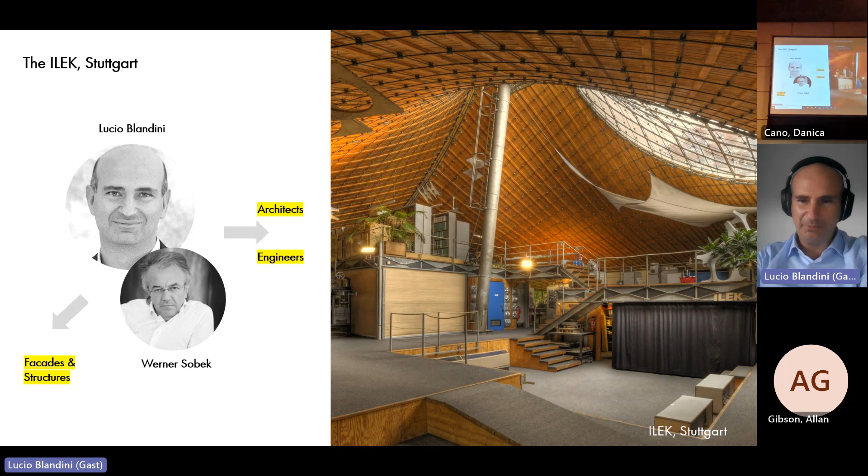So what you see on the right is our working space when it is all cleaned up, like last week for a symposium. So what are we working on?

We set up, within a so-called Collaborative Research Center, an interdisciplinary research group among 14 institutes: mechanical engineers, structural engineers, architects, people working on chemical aspects, on informatic aspects, and so on, with the idea that if buildings would be much more dynamic, more capable to react to different conditions, that would lead to better performance and to less resources. So we've been inaugurating a tower, which is an experimental tower, 36 meters high.

And the specificity of this tower is that we have not just a classical steel frame, but a steel frame with embedded motors, actors we call them. And this building is able to move itself. As you can see, when the actors are implemented, the building can move up to 15 centimeters at the top. And the way we are now bringing and pushing it to move is the way we can dampen it down in the future when there is a big earthquake, wind turbulences, and so on.

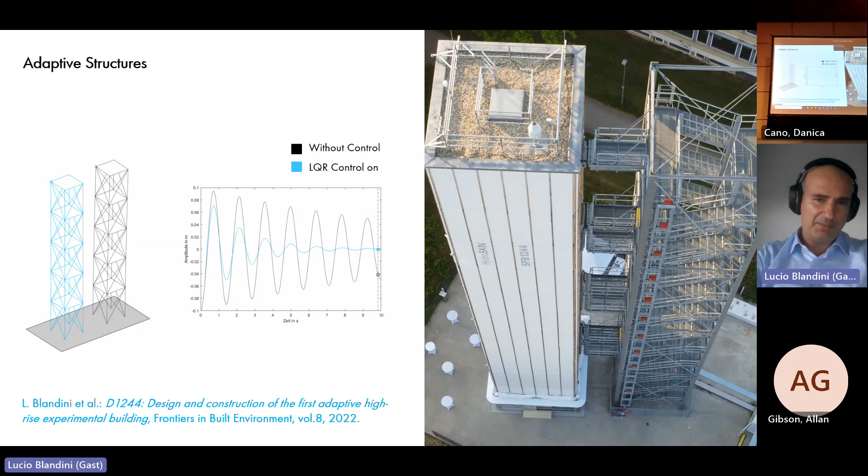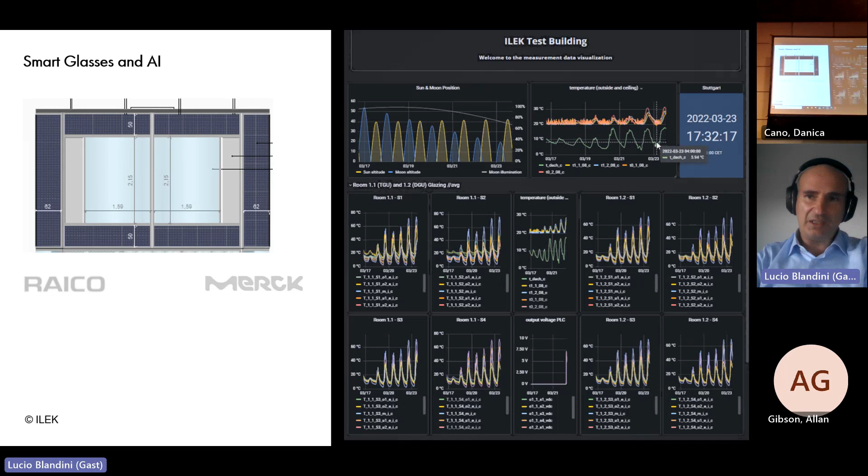We can even track the position of the sun. And actually there is even more potential behind that, because we can combine the glasses, the smart glasses as they are, with the potential of artificial intelligence and create profiles, create solutions that are reacting much quicker than the user. So we have a totally different interaction between people and architecture. It's a different perspective from what Ben was talking about, human-centric in terms of wavelength, but it places the people back in the center of the architecture and creates a special relationship between people and facades.

What we've also been working on is potential new solutions for solar shading systems in combination with very light systems, very light facades, like ETFE. So we do not work only on glasses and IGUs, we work on different materials.

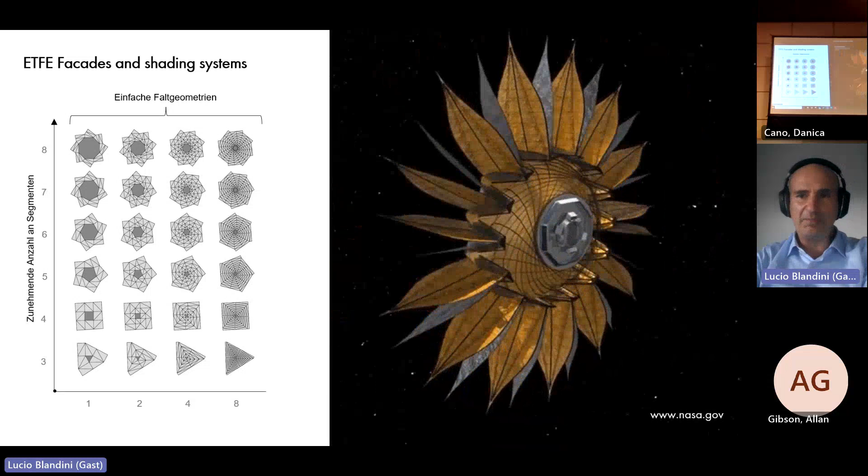Out of this folding mechanism, which has been developed by NASA, and you can see some of the folding studies we've been doing together with people from the Aeronautical Institute, we've been developing a shading system which is supported by a cable net embedded into an ETFE facade. So you see now that the 11th floor of the tower will have this kind of feature installed.

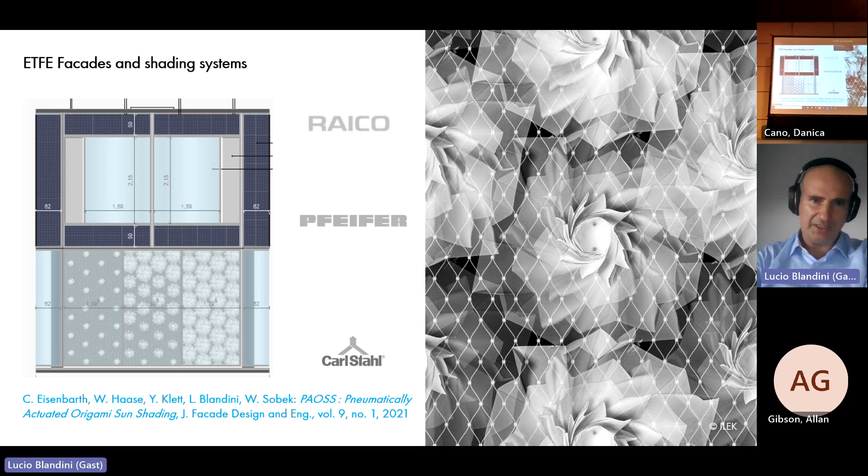And looking further, we have 12 floors, so there's a lot we can do there, and we have already designed for... let me just go back. There is, exactly. So there is a textile system that we developed and patented, the so-called Hydroskin, where we can collect water. I think you can now see the water flowing through this special textile system.

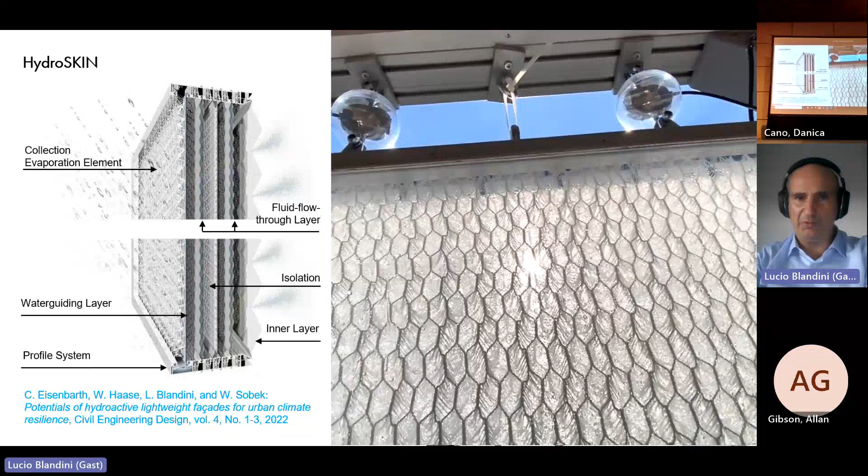By doing that in the summer months, we can cool the atmosphere through evaporation processes. Whenever it is a rainy day, we can use the same textile, of course, to collect the rainwater. This is more relevant in other regions eventually than in the Middle East, even though I've experienced that, especially in Kuwait, there is a lot happening then.

And what you can see here is the measurements that we carried out. So we can cool down 10 degrees by using this evaporation, and we can add this kind of special system on top of a classical IGU facade. On the ground floor, we are working with a very light fiber facade made of glass and basalt fibers, which can be open on the sides so that we have a big theatrical curtain wall.

And it is a different kind of adaptation, what we can show here. It shows the manifold of possible solutions, how facades in the future can be more and more dynamic. Here you see some of the very special effects generated by the different fibers, and their pattern can be very, very free.

It is regulated by parametric design and by computer fabrication. And so we can react to different needs for solar shading.

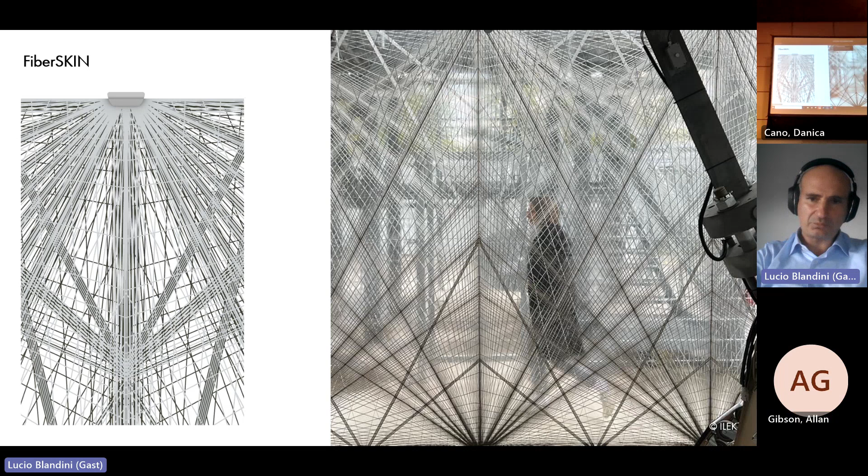It is a solution we've been also using for the expo shades in Dubai and being further developed here for this experimental tower.

And just to close up, one of the facades which is coming next, we call it shading skin. It's a special adaptive system which reacts on one side to the different solar inclination, and also reflects the solar radiation back to the sky in order to reduce the heat island effect. So this is something that will be installed next year.

And so you can see how this tower will be populated in the future by different systems, showing a different generation of architecture. I hope this provided a kind of overview of our research work.

And if you have any questions, Ben, I think there may be some space for that. Then I'm glad to address them. Thanks.